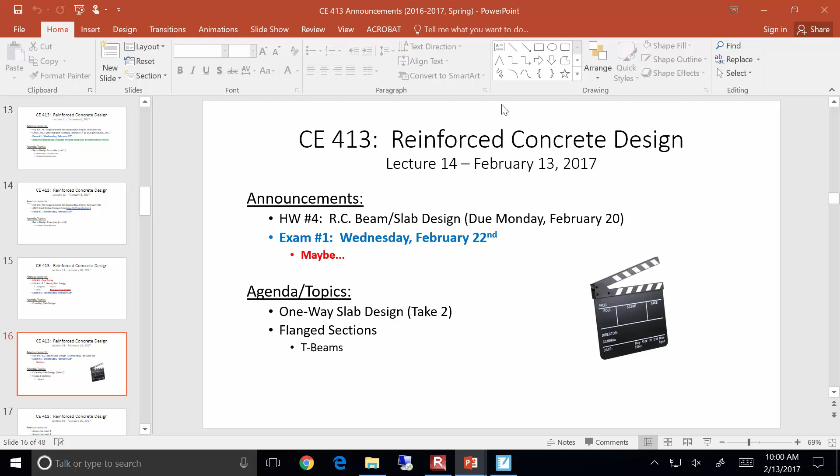First off, let's deal with the simple stuff. You all have homework 4 due on Monday. I'm going to remind you, of course, everybody's almost done with it, right? In all seriousness, though, does anybody have any questions? No, I fully predict that. But it is going to creep up on you if you wait. If you wait until the 19th to start that, it's not going to be pretty. It's going to be a lot of work.

Homework's due on the 20th. That's still a long time. All right, okay.

Now let's talk about the exam. We were at a dead even tie last time we talked about this. I don't want to sit here and have another 20 minutes of discussion on the exam, so we're going to keep this simple. Have you all found the nearest octagon facility or mixed martial arts facility and worked out your decision as to whether or not you want to do the exam on Wednesday or Friday?

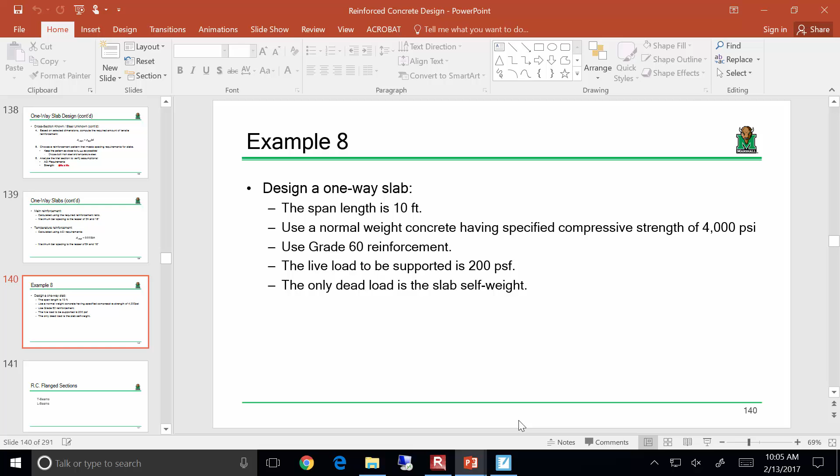Okay, now let's review where we left off and where we're headed with our calcs. So let me full screen that. Okay, so here's our slab, again, that image regarding the slab configuration. The span length for the slab is the spacing for the beams. We're selecting both the main reinforcement, which goes from beam to beam in this direction, and we're also going to be selecting the temperature reinforcement, which goes in the opposite direction.

Now, we're going to assume that the depth is the height minus 1 inch to account for some cover. If your bar size gets pretty big for your slab, you might need to iterate that, but it's just something you can check at the end. If the bar size is a little bit larger, just take your D, trim it down a little bit, and iterate. Okay, so next thing, we have to compute our factored moments. We have a beam width of 12 inches, because when you're doing a slab design, you essentially just say, all right, let's just design a 12-inch strip, and then let's just design that reinforcement everywhere.

Whatever reinforcement I select for that 12-inch strip, just repeat that across the entire slab because that's really what's going on. The slab is 6 inches thick. According to minimum thickness requirements, we're going to design for the minimum thickness, and our effective depth is h minus 1, which is 5 inches.

So the first thing we need is the self-weight of the slab, which for that strip is just gamma times B times H, the unit weight of concrete times the area. We have 0.15 kips per cubic foot, and the area is 12 by 6 inches. Units give us an issue, so we convert, plug and chug, and you get 0.075 kips per foot.

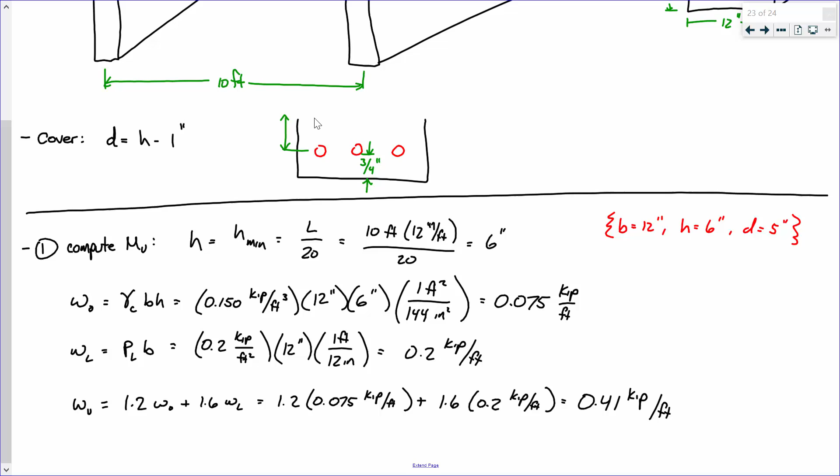After we've got our live load and dead load, we can factor them. 1.2 dead plus 1.6 live gives us a factored load of 0.41 kips per foot. Take that, WL squared over 8. So that's where we left off last time. Does anybody have any questions about that so far? Everybody okay with that?

Okay, so here's where we're at so far. Now you tell me, if we have our factored moment, which is step 1, what's step 2? You tell me. Say it again -- compute Mn by doing what?

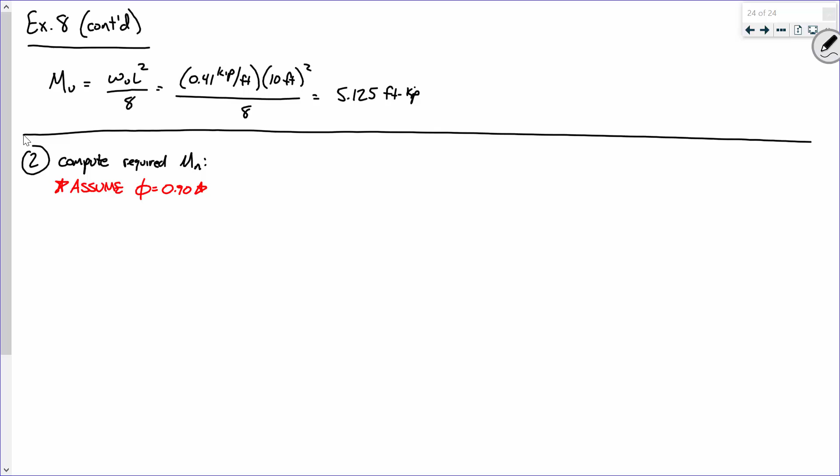Assuming phi. This will be something that ultimately you should go and check in the end. So we're going to say compute required Mn by assuming phi. We have Mn required is Mu over phi, which is 5.125 foot-kips over 0.9. What does that give you?

5.69, you said? Like that? Now that's in foot-kips. I'm ultimately going to take that moment and combine it with a bunch of f'c primes and beam dimensions that are in inches. So I'm going to convert that to inch-kips by doing what? Multiplying by 12 -- you don't divide by 12, you multiply. So what is this times 12?

Coffee's starting to kick in, right? All right, sound good? All right.

Now this next one, the calculation's a little involved. Essentially what we're doing for this problem, and in slab design in general, is we are designing a beam with a known cross-section. We know how wide it is, we know how thick it is. So all we need to do is solve for rho. Again, rho equals 0.18 f'c prime over fy. This beam, we know what it looks like, so our rho calculation is a little more complicated.

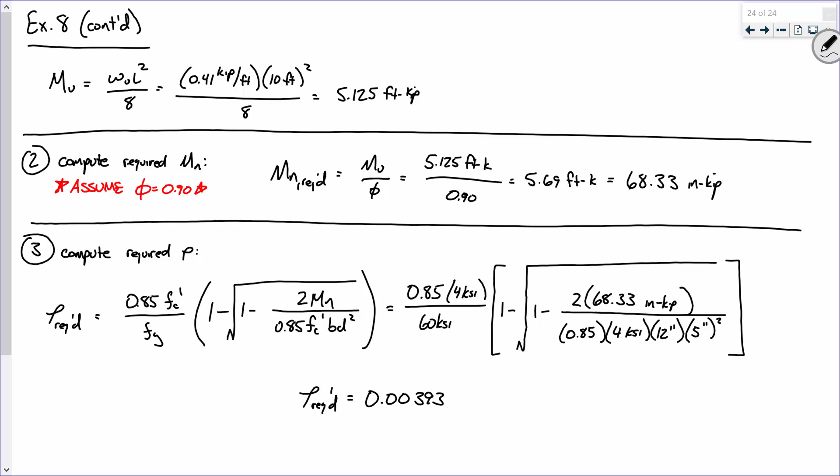All right, I need a number for this. What do I have? Okay, so is that an accurate representation? Do I have a second on that? All right.

All right, now, to compute required steel areas.

All right, computing required steel areas. So we've got main reinforcement. All right, main reinforcement, let's see, we're going to go with AS required, which is what we've been computing, rho BD.

So rho B is what? There we go, everybody's paying attention. And what's D? 5. Now what do we have here?

Checking this out, depth of the stress block, that's A. You have to do that when you're going and validating the capacity at the end. We have to have a design to check, you see what I mean? What do we have here?

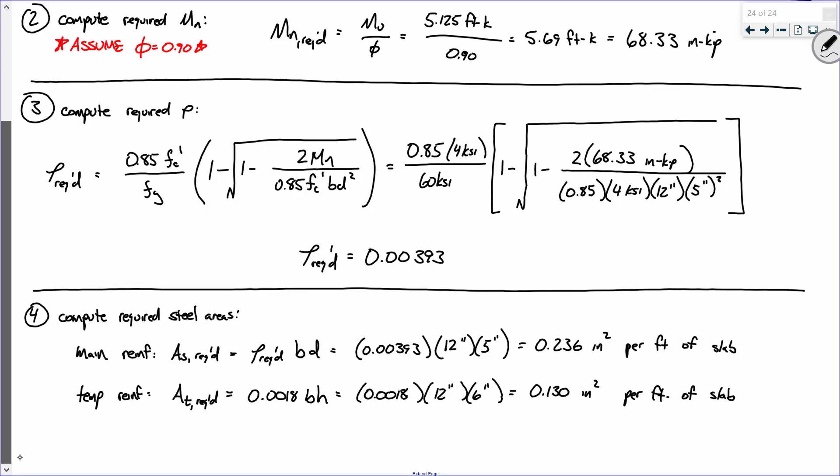Okay, so that is 0.0018, 12, 6. All right, so what do we got? 0.129, 130. I got a second on that? All right. Is everybody okay with that? All right, okay.

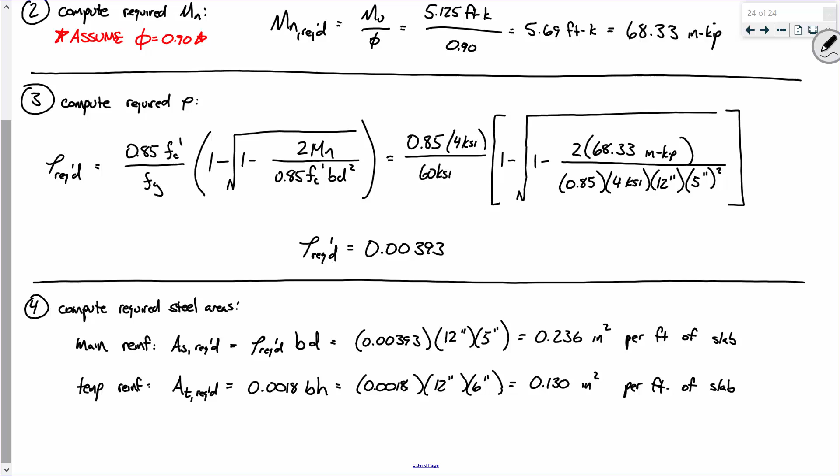So does everybody have everything they need on this panel? Okay, all right. Then let me do this. Okay, let's select some reinforcement, but in order to do that,

I need to calculate some maximum spacings. In other words, let's say I had a really economical choice of rebar, and I could say, all right, let's use number 11 bars, but let's space them at like 30 inches. Hey, we'll save money on the steel. Do you really think that a slab is going to behave the way you want it to if your rebar is spaced like 30 inches? You're going to have a massive area where there's just no rebar.

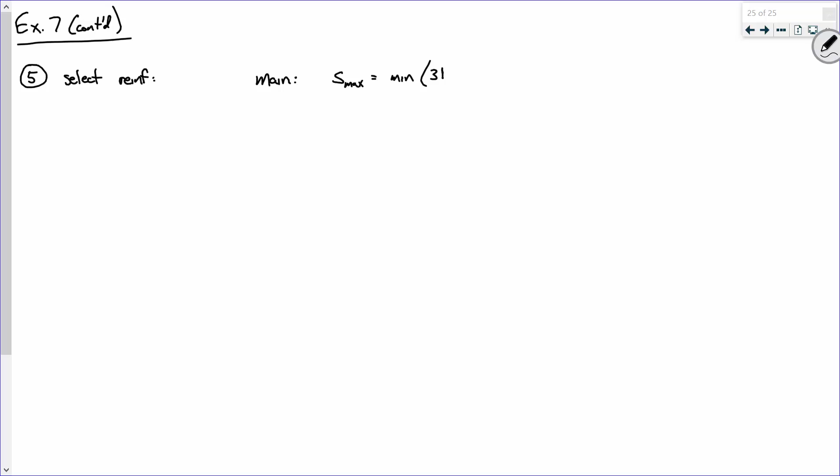So you have to have at least some semblance of rebar spaced evenly throughout the slab, and that's what we're doing here when we calculate S max, or maximum spacing. So maximum spacing for, well, here let me write this. For main steel, S max is the minimum of 3H and 18 inches, which is the minimum of 3 times 6 inches, or 18, which, heck, that's just 18 inches.

I swear, when this pen gets closer to the top of the screen, it gets choppier. All right. For temperature steel, it's the minimum of 5H and 18 inches, which I don't even need to do any math. I can tell you that's 18 inches.

So my point is that for this particular slab, I don't care what rebar pattern we pick, we cannot use a spacing larger than 18 inches. Fortunately, our slab design aid doesn't report spacing larger than 18, so that makes our life a little easier, but it's something you need to go through and check. On this slab, it's 18. Maybe it's not on the next one. Okay? Does that make sense? Okay.

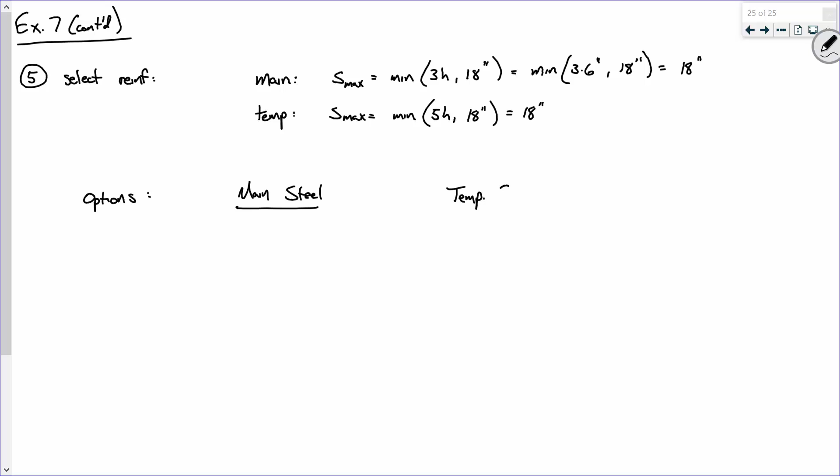Okay. Now let's take the, let's start off with the main steel. So what is the area required for the main steel? 0.236, okay? So I'm going to sort of borrow yours a little bit. So let's look at bar numbers and let's see 0.236.

What is a good option for number 3 bars, let's say? Like if we had number 3 bars, how far apart could we space them and it works? Five and a half inches. Do I have a second on that? Everybody see that? So I could use number 3 bars spaced at 5.5 inches, and that would work. Now what's the area on that?

All right, what about number 4s? Is there a good viable option there? Somebody else, or back here. Anybody see a good spacing there? 10 inches. Now why did you pick that? What's the area? 0.24. Ooh, interesting. Now we have 2 options that have the same amount of area.

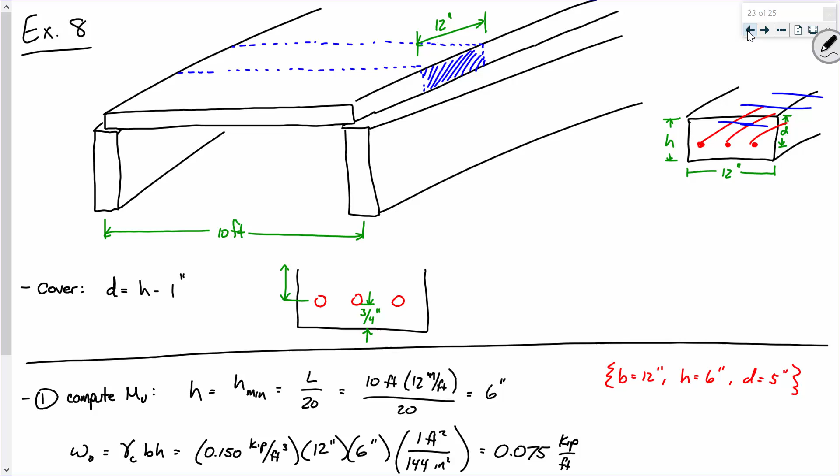I got one—could you go back to the original slide? You mean this? No, sorry.

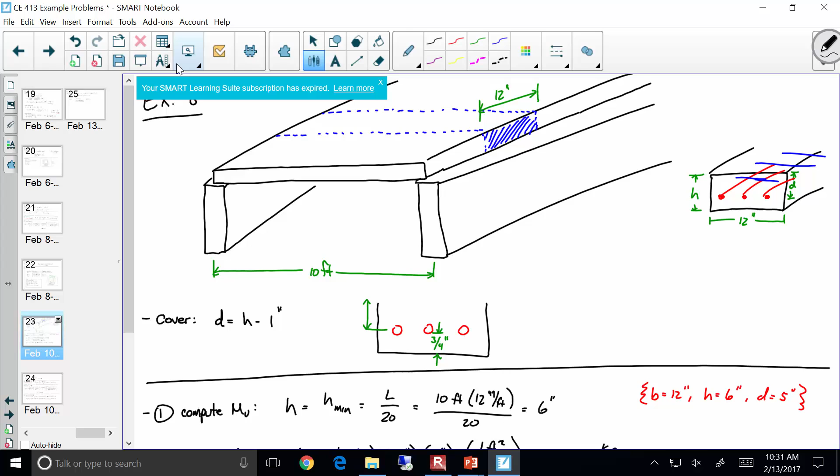No problem. Why is it 0.24 square inches per foot? Is that not what the table lists? No, that's the beam design chart. I'm looking at the other one. The one you're looking at here is for beam design.

There's another one like this one—this is for slabs. Oh, okay. Is everybody else finding that 0.24?

No, the number 4s—it's the same amount of steel, and ultimately, if I was buying per tonnage, I'd be spending the same amount of money. But the second option, that's literally fewer bars. So it's fewer bars to handle, fewer bars that need placed, fewer bars that need tied in.

It's going to be less labor down the line. Does that make sense? Now, another point—it's not the difference between number 3s and number 14s, it's the difference between number 3s and number 4s. So you could say, well, what if you pick something like number 14s? Well, number 14s are really, really heavy and they're harder to handle. Number 3s versus number 4s, I don't know that there's a big difference in terms of workers handling them. I mean, they're a little heavier, but not terribly.

Are there any other options that are 0.24 square inches? So really, if I'm going to pick, these are the two ones I'm going to pick off of, and I'm going to pick based off of this.

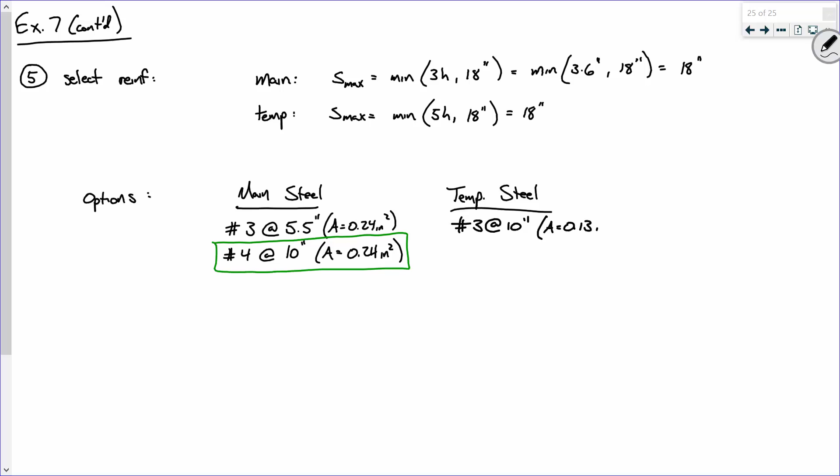Does that sound good? All right, so I propose to you that the trial design for this slab looks something like this. So here's the slab, and I'm going to blow the slab up a little bit so everybody can see what's going on.

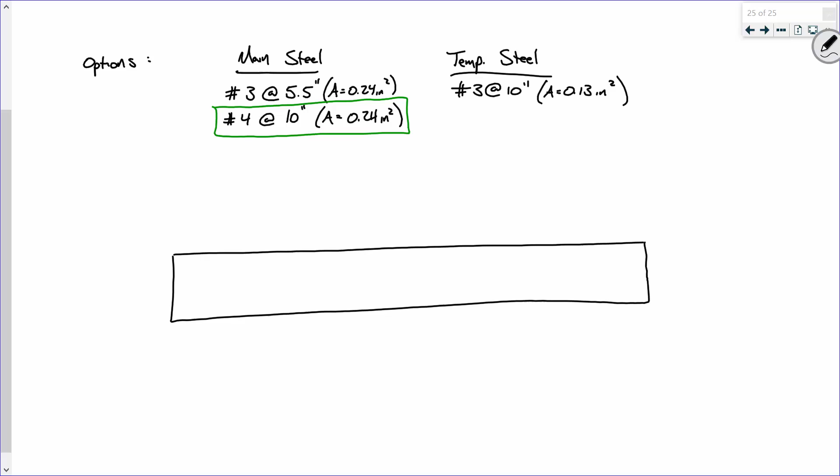All right, so there's the slab. There's that, and there's that. So those are the two beams going in and out of the page, and the spacing between those beams is about 10 feet. Okay, does that make sense?

All right, so the thickness for this slab is about 6 inches. So it is 6 inches. This is 6 inches. Okay, now...

The main steel, the number 4s at 10 inches, okay, they're going this way, okay? Because think, if this is bending, it's bending like this, right? So you need that main steel to resist that bending in this fashion.

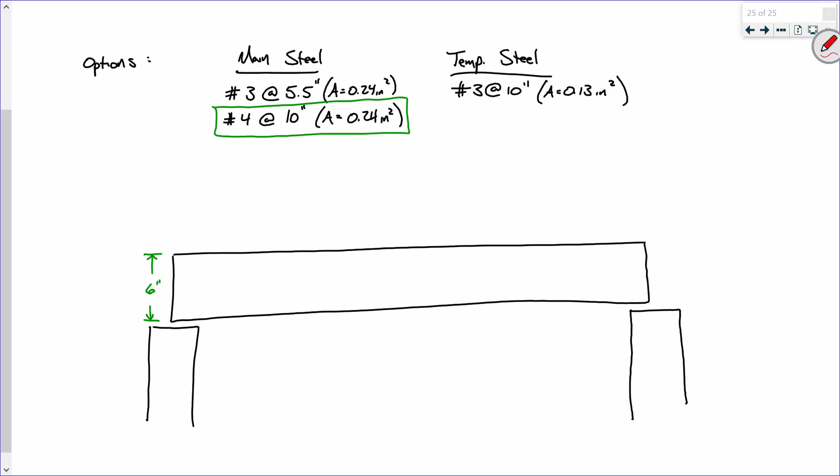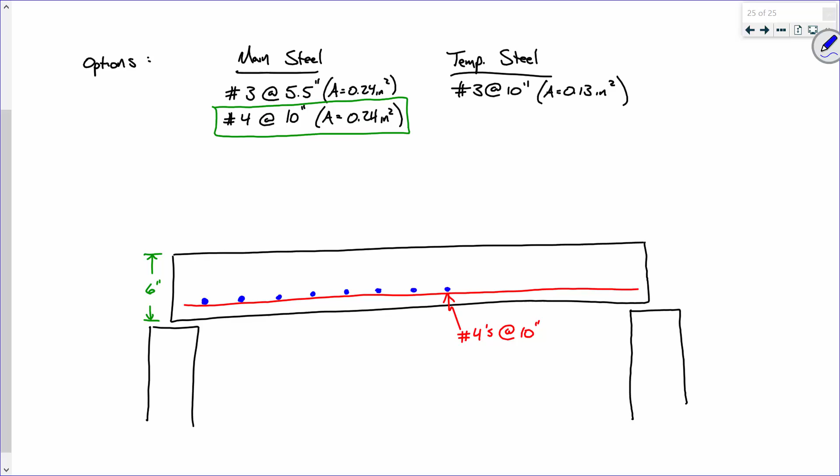The temperature steel, we also need steel going this way, okay? So the temperature steel, typically what you do is this—we're going to have something like that, something like that, it's just going to sort of go like this. You don't have to draw as many as I am to get the picture. So these are the number 3s spaced at 10 inches, going in and out of the screen.

Does that make sense? So think, when I place load onto this slab, it's going to want to deform like this. So these red bars, these number 4s, those are the ones that are primarily picking up that resistance due to bending, okay? But the blue bars, the ones going in and out of the screen, we need some there because we also need to resist that potential cracking due to changes in temperature, shrinkage, creep, things like that. Again, we're taking that rebar and placing it on the bottom because that's the region of the slab that's going to be experiencing tension. Make sense? Yes, sir?

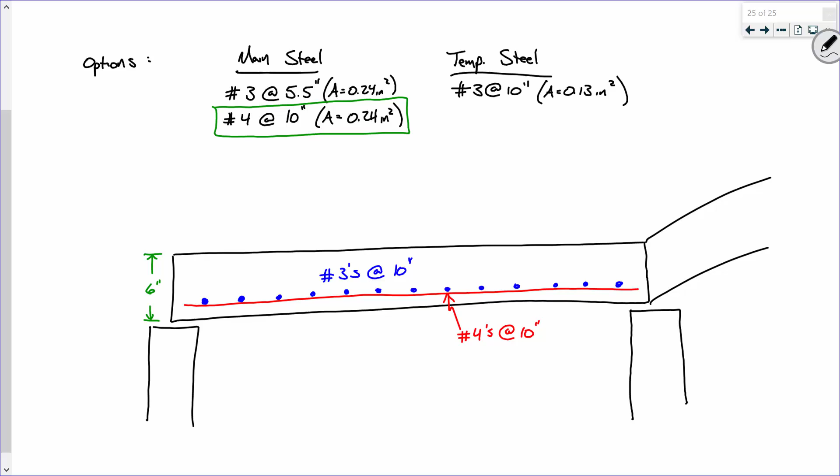You can if you want. The big thing is just make sure you're indicating which is the main steel, which is the temperature steel. But yeah, you're more than welcome to do that. You can also get fancy with it if you want and do this—you're going to have red bars going like this, and you're going to have the blue bars doing that, etc. Does that make sense? Everybody else okay with that? Everybody good?

Okay, now here's, I'll say, the crux, or here's the issue with this calculation, and that is we're making sort of maybe a little bit of an odd assumption with this. We're assuming that you've got the slab and the beam, and they're just sort of sitting on top of one another. Now, in a steel structure, yeah, that's the case—you might have some shear studs to lock that slab compositely with the beam, but in the end, it really is a concrete slab sitting on top of a steel beam.

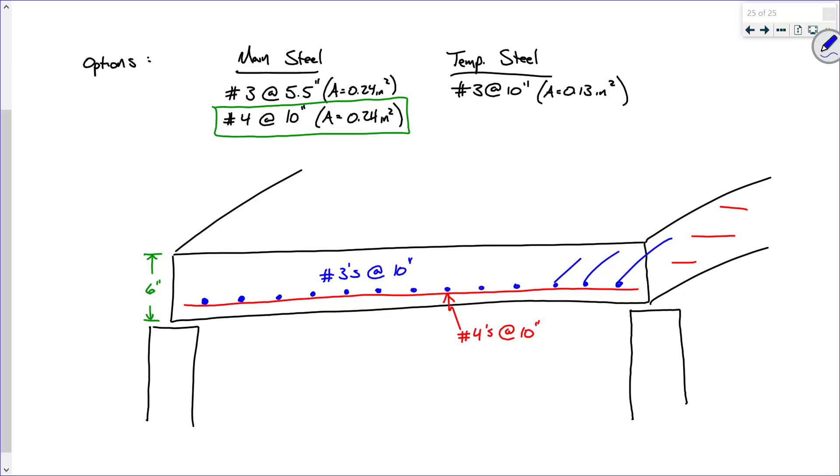But it's possible in a concrete structure that that's not the case. What's possible in a concrete structure is that you get something like this.

Okay, now this is a little different. This is an instance where the slab and the beam have been cast integrally together. So it's one continuous floor system.

There's some serious advantages to this, because if you're looking at the beams, you can count on a portion of that slab as being effective in resisting load for those moments, and we call that a T-beam. If you can count on that monolithic construction, you can get a significant advantage in capacity for that beam. Ultimately, you might be able to take that beam that was 24 inches deep and make it 20 inches deep, because you got part of that slab working for you. Does that make sense?

So I guess the official name would be looking at a flange section, a concrete section that has a significant upper flange. Now we can have either T-beams or L-beams. By L-beams I mean, imagine you've got the end of the floor system, and it sort of gets cut off right here, so this particular beam is an L-shaped beam. You see what I mean by that?

Mostly, more often than not, we're going to be looking at T-beams, though. Sound good? Well, no, I guess it doesn't.

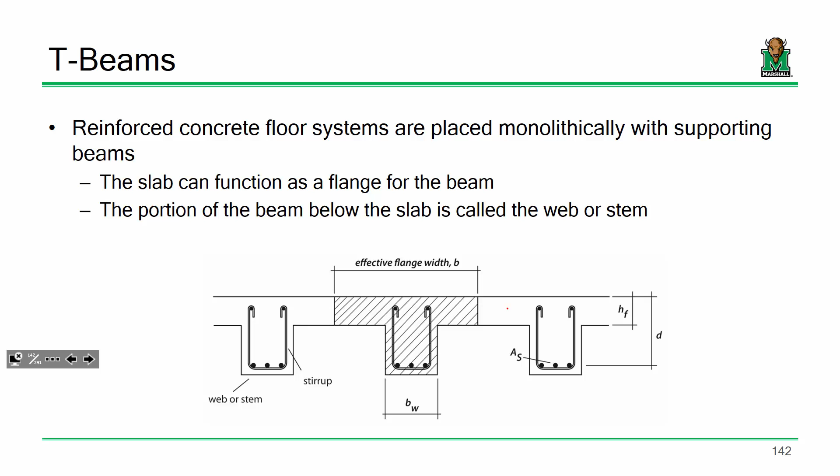Don't get me wrong, most of the time in bridge structures we do use the tributary width, but in building structures we're really not allowed to do so, and here's why.

If you think about it, it kind of makes sense. If I got a beam spanning from here to here, and I'm stepping on the beam, I'm going to get a fair amount of stress in the beam, and a fair amount of stress in the slab portion.

But if I start looking farther and farther away from that beam, that slab is seeing less and less load. I'm not saying it's not going to see any, I'm just saying if I'm standing right there on the beam, the slab that's all the way down there really isn't seeing very much stress.

The closer you get to the beam, the more stress that you see. What I'm trying to do is isolate a certain portion of that slab that I can say the amount of force in this slab is about equal to what's going on everywhere else. So in some cases, yeah, tributary width works, but sometimes it's not that simple.

So in ACI, they offer us a pretty simple approximation for determining the effective flange width for a T-beam or for an L-beam, which are the beams on the side. That effective flange width, this dimension right here, we compute for T-beams as the minimum of the following quantities.

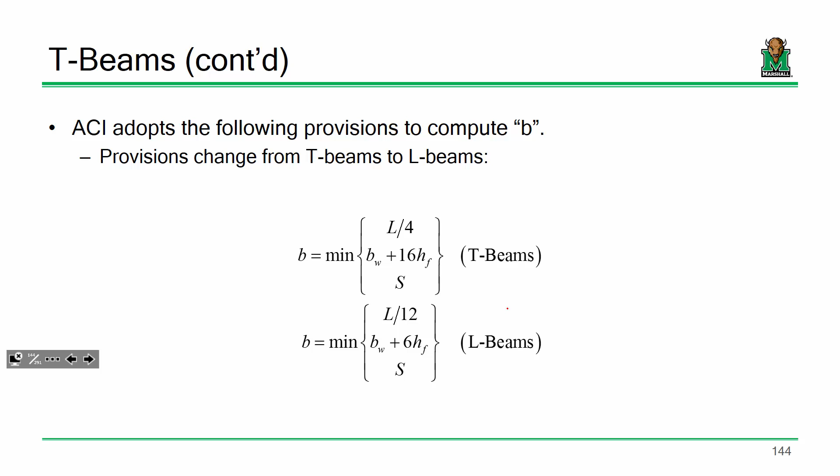Okay, now here's that — that's simple, and I'm right. When I say that's simple, I'm talking about your considerations on things like homework problems, exam problems, and really the concept. What gets complicated is this.

This is where I think you've got to make sure you're paying attention, because I'd argue that in the actual mechanics of concrete design, this is when it starts to get a little tricky, a little complicated. All right, so C equals T.

So I say my tensile force is the area of steel times Fy, and my compressive force is whatever the area times 0.85 Fc prime is, and then I solve for A.

Make sense? Now let's say, just to throw some numbers in, I do that and I have a flange thickness of 3 inches, and I calculate an A value of something like 2 inches. This would be an example of what I'm calling a rectangular T-beam — meaning it's a T-beam, but the stress block is rectangular, just a rectangle.

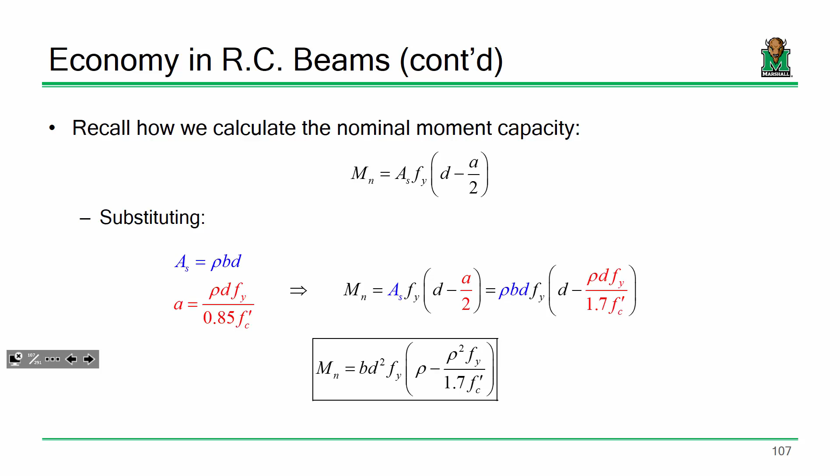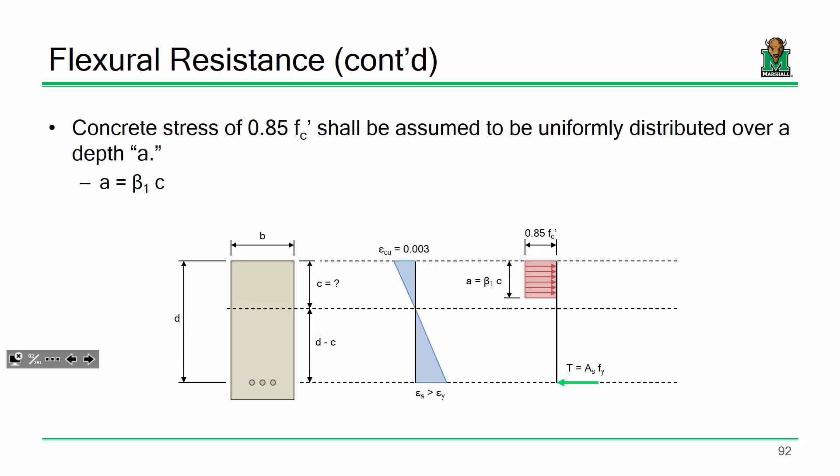I want to look at this beam. This beam is a rectangular beam. Its stress block is rectangular, right? It's got some width B and some depth A. And its moment capacity is As Fy times D minus A over 2. Is everybody with me on that? How's the moment capacity for this any different than the moment capacity?

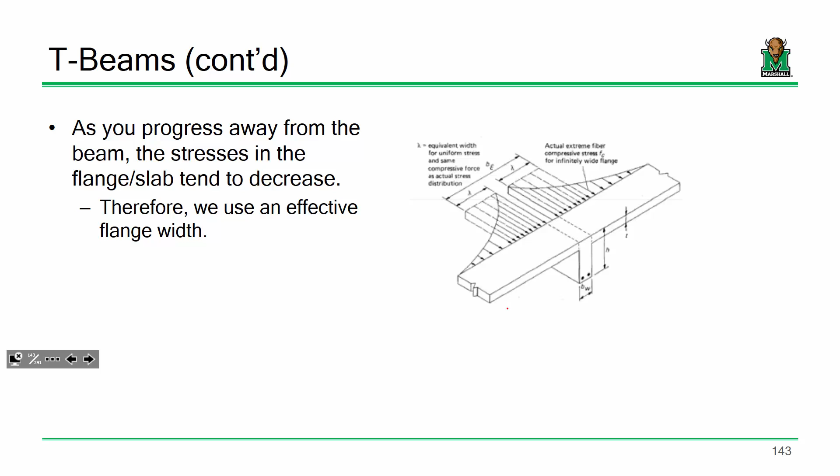How's that any different than the moment capacity for this one? We have an area of steel times Fy on the bottom, and on the top we have a rectangular stress block. So to calculate the moment capacity of this one, it's just A_s F_y times (d minus a over 2).

But if I've got this scenario, it's a little different, because my stress block is not rectangular. My stress block is T-shaped. So you can't just say force times moment arm and that's it, because what's my moment arm for this shape? You could say you've got to go through and compute centroids and things like that, but don't worry, I've got a simpler way of going about this. Does that make sense? Everybody okay with that?

The point is that there is a difference between what we're calling a rectangular T-beam and a true T-beam. A rectangular T-beam has a stress block that is, in fact, rectangular. A true T-beam has a stress block that is T-shaped. That's when you've got to roll up your sleeves and make sure you're doing equilibrium and your moment calcs right. Sound good?

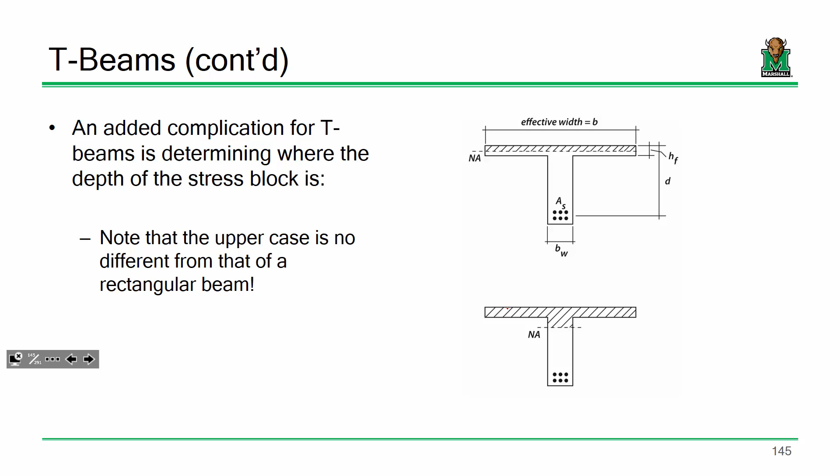No, that's something we have to determine. And there's a way that we can go about that. Now let me see what time it is. All right, we're running out of time, so I'm going to do that next time, but let me explain what's going on.

So I've got two examples, 9A and 9B. Now these are both representative T-shaped beams, and what we're going to do is compute the moment capacity for both of them. What we're going to find is that the moment capacity for one of them is going to be reflective of a rectangular T-beam, and one of them is going to be a true T-beam. I think you'll understand when you go through the math how that's going to work.

The long and short of it is this. I'll get to your question in a sec. So we've got a stress block here, right? Now this flange thickness is, what, 4 inches? So if I calculate the stress block, just assuming it's rectangular, and I get a stress block that's 7 inches, well then it would mean my original assumption isn't correct, because I can't have the stress block go all the way down here if I've only got 4 inches. So that would be an instance of a true T-beam. If it came out to be 1.6 inches, then I'm in rectangular territory. So the only way we figure it out is by just trying.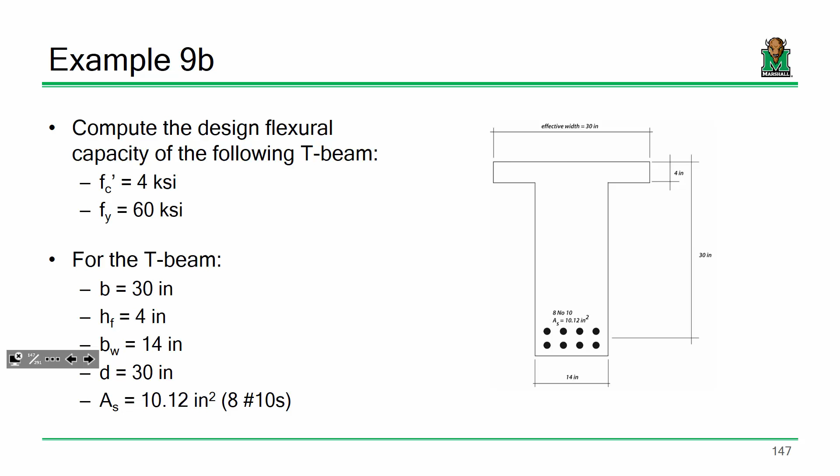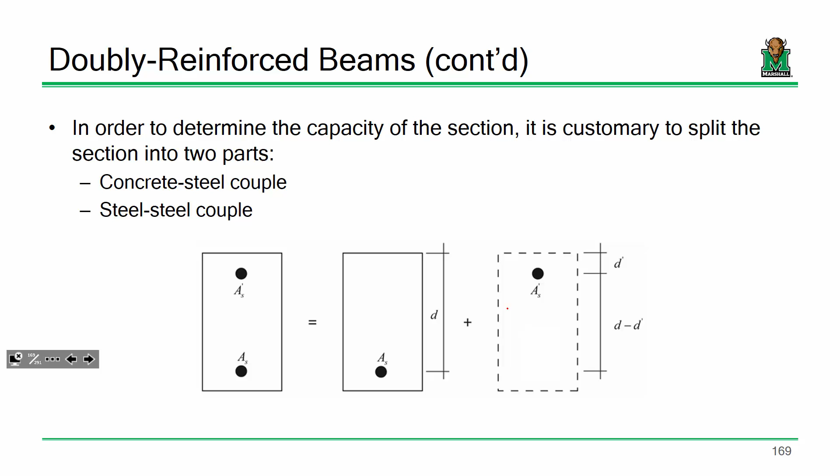Exactly right. Yes, sir? How come you only have steel in that one flange, not in the upper part? To answer your question, we do consider doubly reinforced beams where we have steel up top. We will do that later. I'll skip ahead a little bit. I mean, we have doubly reinforced beams with steel up top, and you can consider it, but it's one of those 'walk before you can run' type things, so we will get to it, I promise.

But let me also say, steel in compression is there, but it is certainly not as effective as steel in tension. Think about it like this: you've got concrete in compression, and it can handle a lot of compressive stress. You can throw some steel up there, but that concrete's going to be doing the majority of the work. Really, where you need steel is steel in tension. I'm not saying there isn't steel in compression there, I'm just saying we don't really need to worry about it right now. Does that make sense? Everybody else okay with this?